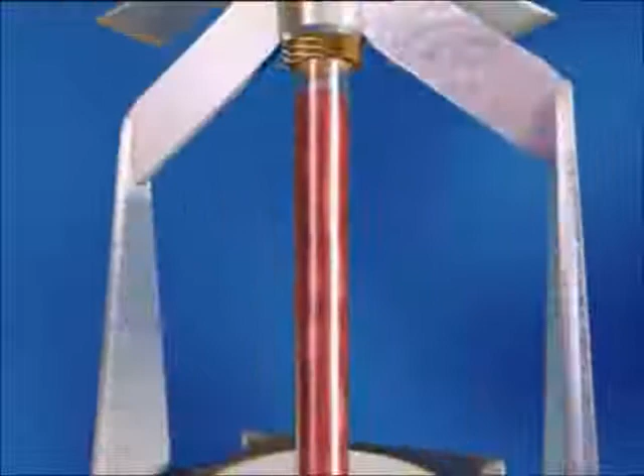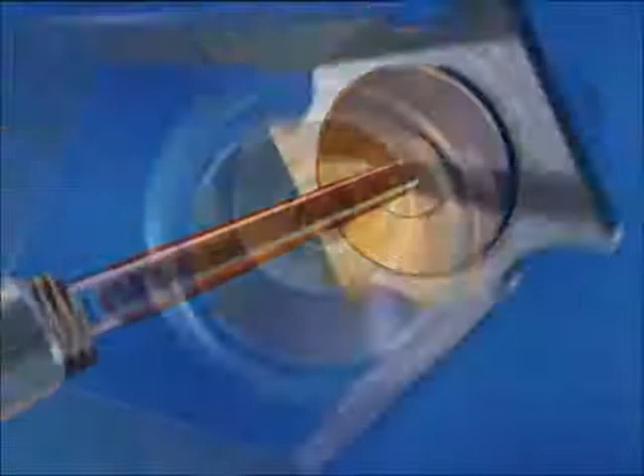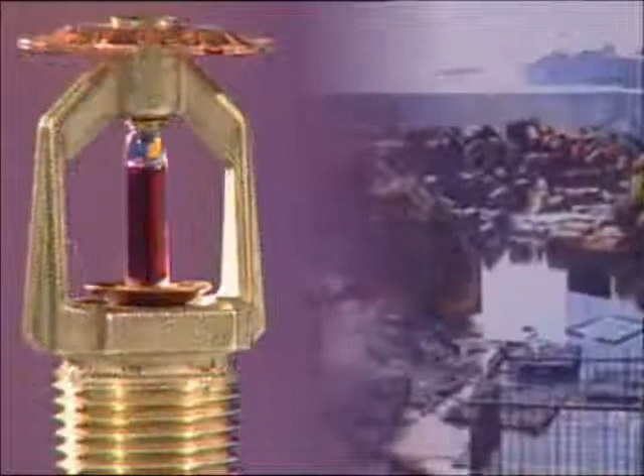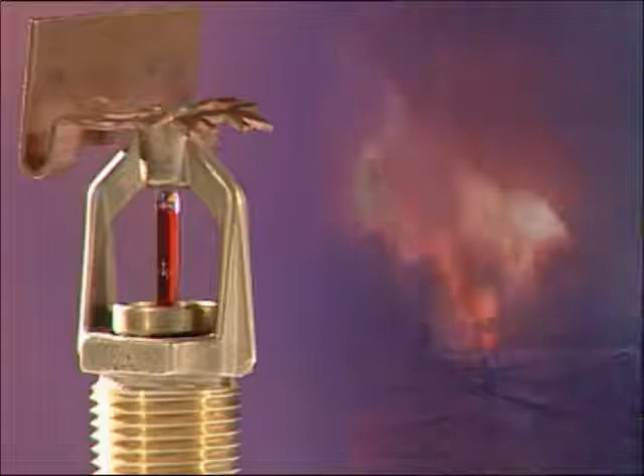Fire sprinkler systems were invented over 120 years ago. Since then, several hundred million sprinkler heads have been installed throughout the world. In that time, they've effectively protected thousands of buildings, helped to prevent the financial collapse of numerous businesses, saved countless lives, prevented innumerable burn injuries, and protected the environment from catastrophic fire-related pollution. They're universally acknowledged as the most effective first line of attack against fire.

The world's first rules for the design and installation of automatic fire sprinklers were written in the UK by John Wormald in 1885. Fire sprinkler systems in the UK are generally designed in accordance with British Standard 5306 Part 2 and, in some instances, Loss Prevention Council (LPC) rules for automatic sprinklers. American rules may sometimes be used, being Factory Mutual or National Fire Protection Association.

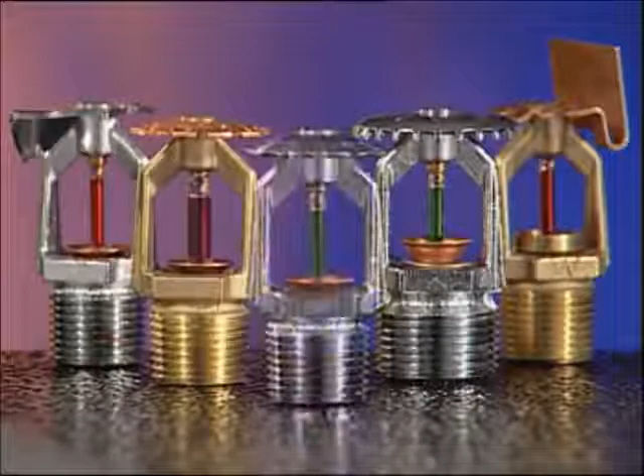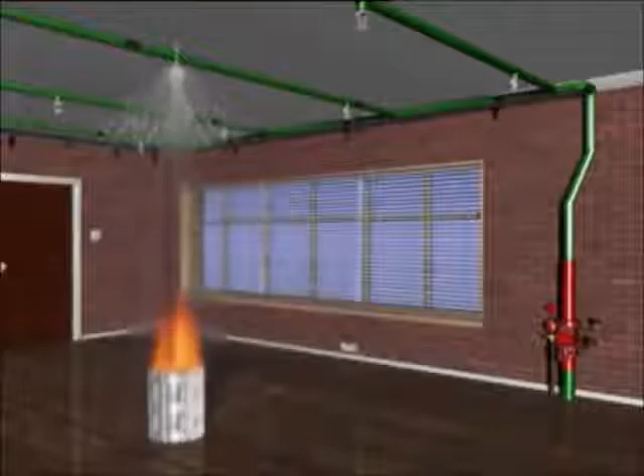Sprinklers are designed to cope with the fire risk presented by each individual building and may also be specifically configured to save lives. Water still remains the most effective firefighting medium available. Sprinklers will deliver water right into the heart of a fire during its early stages through a specially designed sprinkler head. Sprinkler heads are unique. They automatically detect a fire, discharge water right into the seat of the blaze, and operate a local alarm. They can also operate a remote alarm to alert the fire brigade or other emergency centre.

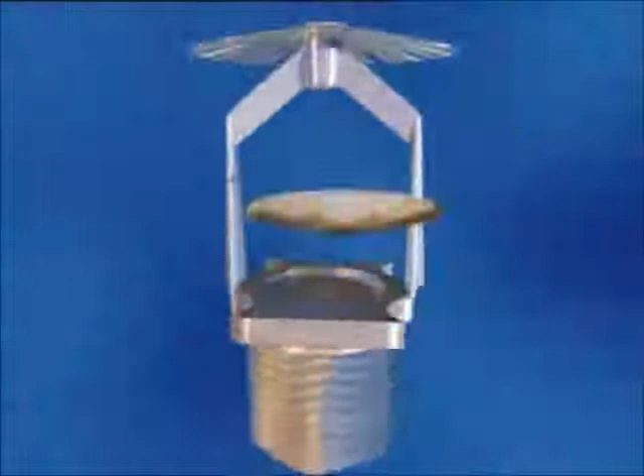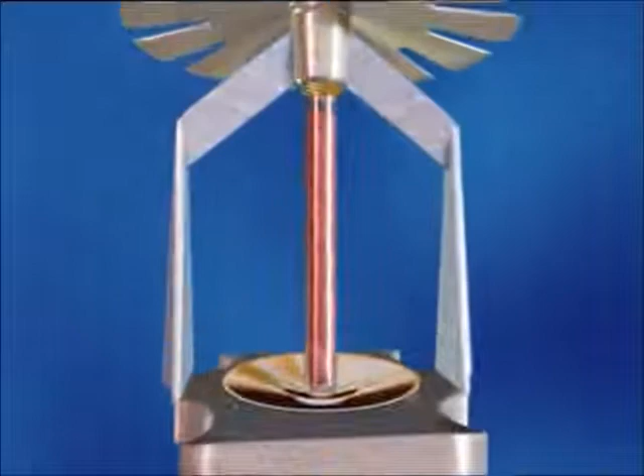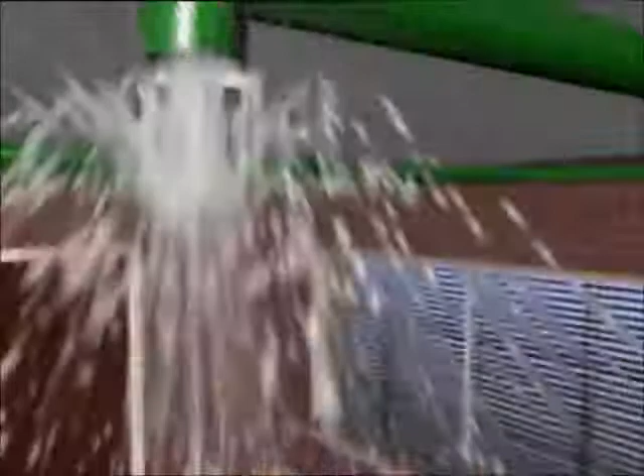A typical sprinkler head comprises a threaded body to connect to pipework, with a valve seal to hold back the water. The valve seal is retained by a glass bulb which contains a liquid that has a high coefficient of expansion. A small measured quantity of vapour remains trapped when the bulb is hermetically sealed. When the liquid expands under the influence of heat from a fire, pressure in the bulb rises until the vapour is compressed. Further increases in temperature cause a rapid build-up of pressure sufficient to shatter the bulb, releasing the valve seal and allowing the water to flow onto a water distribution deflector. This results in an even distribution of water droplets in a predetermined pattern over the fire.

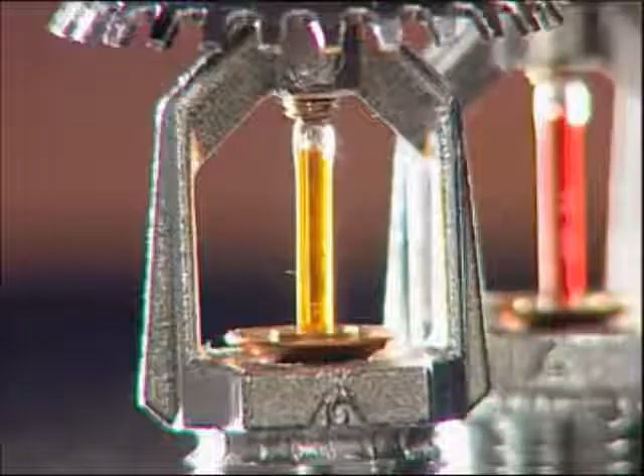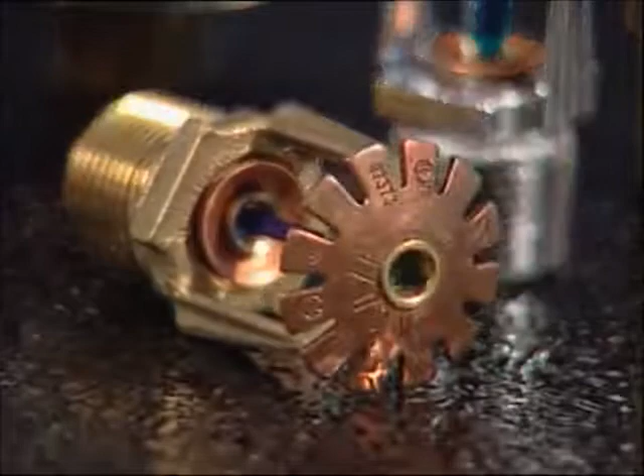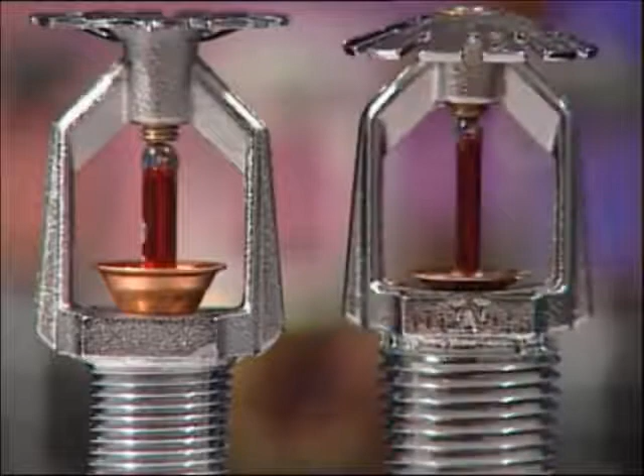Sprinkler heads are available in a variety of operating temperatures, which are identified by the color of the bulb. The specifier has a vast array of sprinkler heads available to him. Each type of head is designed to cope with different fire risks, different operating temperatures, and different operational requirements. The British Standard defines fire risks as light hazard, ordinary hazard, or high hazard. Generally, as the hazard increases, so does the water discharge or density discharge.

Conventional sprinklers can be mounted in either the upright or pendant position, with a deflector designed to spray a proportion of the water discharged onto the surface of the ceiling. Spray sprinklers in upright or pendant positions are used for applications where all the water needs to be discharged downwards. Sidewall sprinklers are primarily used to keep ceilings clear of pipework for aesthetic reasons or to avoid having to disturb existing ceilings when installing. Each sprinkler protects up to 17 square meters in light hazard fire risks and 9 square meters in ordinary hazard fire risks.

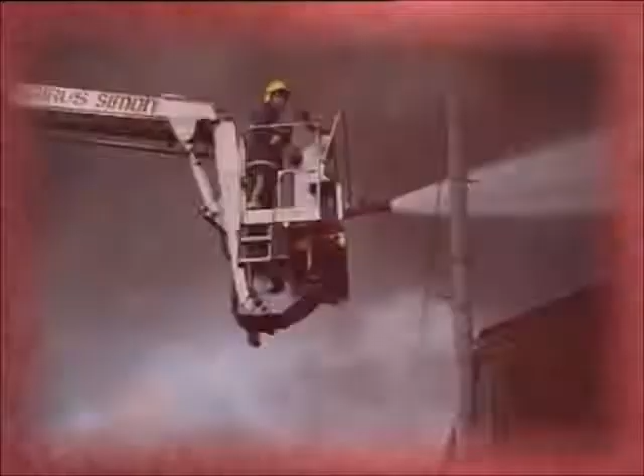Sidewall sprinklers with extended coverage are specifically designed to give an extended coverage of water distribution, with one sprinkler able to protect an area of up to 21 square meters. This type of sprinkler must have a quick response bulb. In a fire, few deaths result from direct contact with flames. The greatest threat comes from inhalation of the products of combustion, such as carbon monoxide, hydrogen cyanide, hydrogen chloride, other toxic gases, and the associated heat.

The reaction time of quick response sprinklers minimizes the life-threatening levels of toxic gases and temperatures. In many environments, there are people who cannot escape without assistance, such as in hospitals or homes for the elderly. Quick response sprinklers provide valuable time for those in charge to assist their escape.

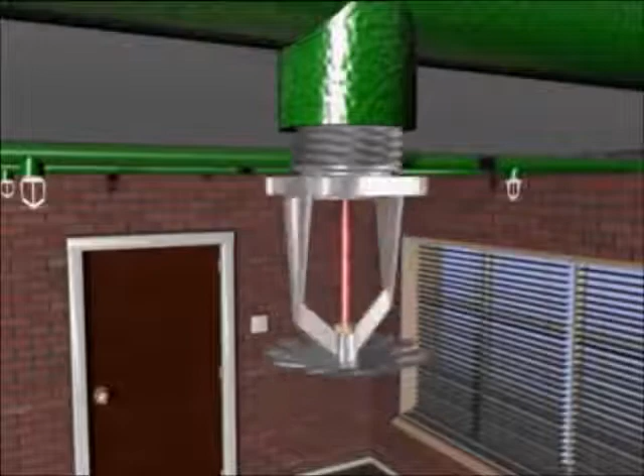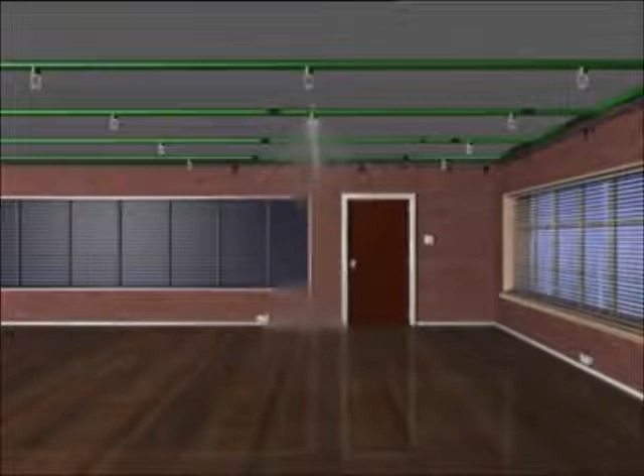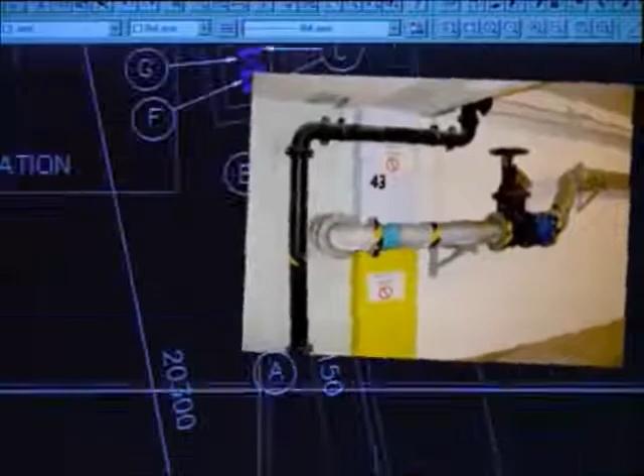A sprinkler head is connected to a water supply via a network of pipes fed throughout the building. The area protected by each sprinkler head can vary from 9 square meters to 21 square meters depending on the fire risk. The pipework is hydraulically designed to ensure the correct flow and pressure of water is maintained at each sprinkler head. The water supply to the system can be fed from the town main for light to medium fire risks, such as residential, offices, hotels, and light manufacturing and commercial occupancies. For high fire risk areas, such as heavy manufacturing and warehouse storage, a pumped supply from a water storage tank or reservoir is normally necessary.

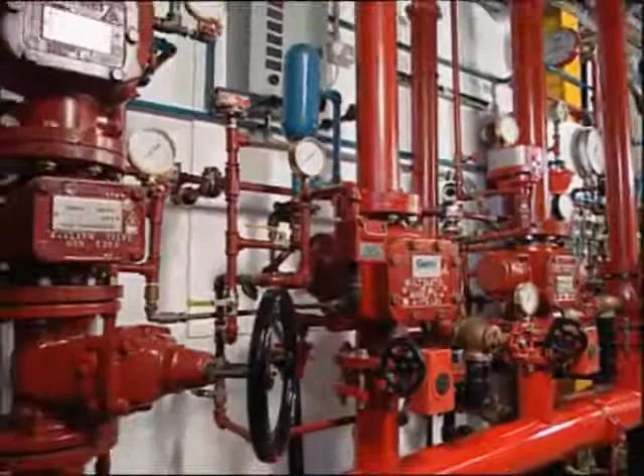The design requirements are specified in the British Standard BS 5306 Part 2 and LPC, FM or NFPA design rules. A control and alarm valve automatically delivers the flow of water to the sprinkler heads. There are generally 5 types of sprinkler system that all require different valve arrangements. A wet system is where the pipework is permanently charged with water and used to protect premises where temperatures are unlikely to fall below freezing point.

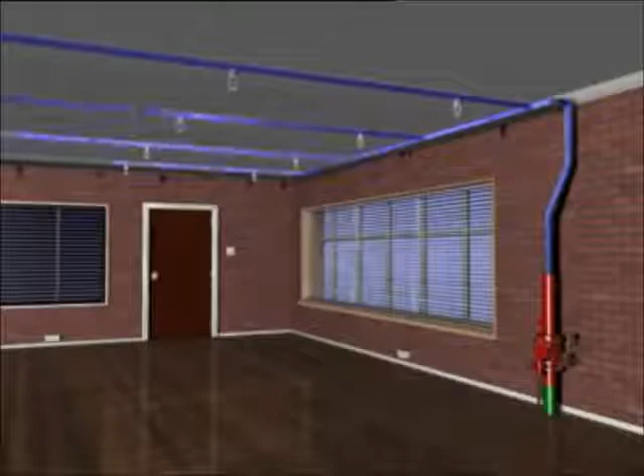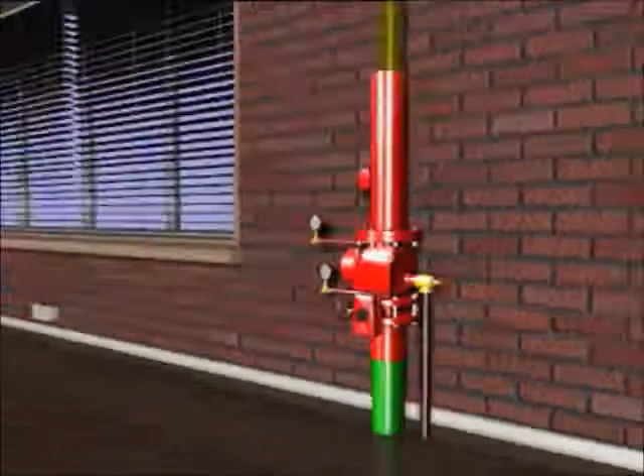Where the ambient temperature may fall or be below freezing point, the presence of static water in the sprinkler pipes is clearly undesirable. In this situation, a dry system can be installed in which the pipework is charged with compressed air. When a sprinkler operates, the compressed air is released and the control valve opens, allowing water to flow into the pipework and to discharge from the operated sprinkler heads.

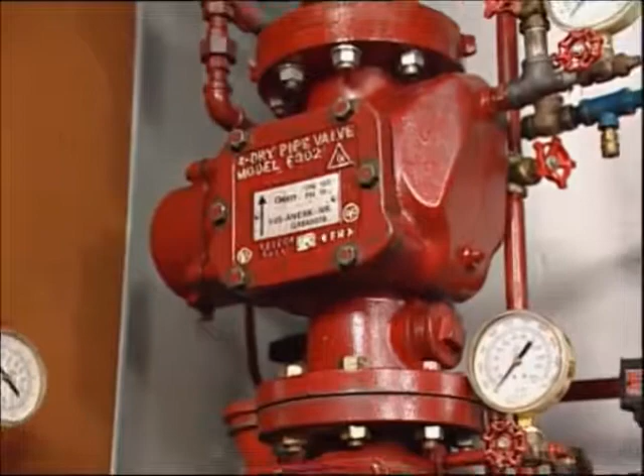An alternate wet and dry system, as the name implies, allows the system pipework to be alternately charged with water in summer and with air in winter, when there is a risk that the ambient room temperature can fall below freezing.

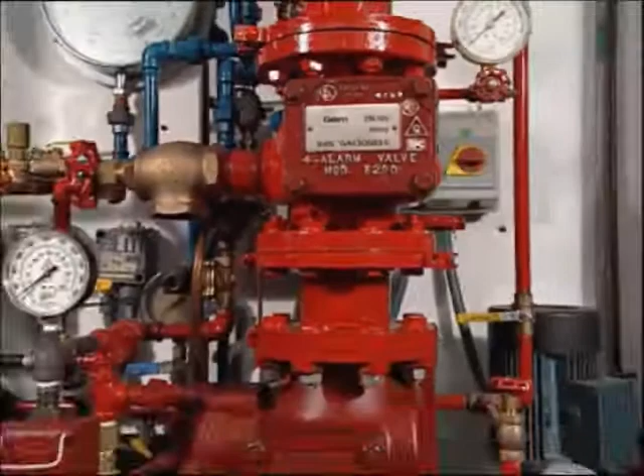Pre-action systems are comprised of a standard sprinkler system and an independent electrical system of heat or smoke detectors installed in the same areas as the sprinklers. On receipt of a signal from 2 or more detectors, the main control panel automatically opens the control valve, allowing water to flow into the sprinkler pipework. Water is only discharged when the individual sprinkler heads reach their operating temperature.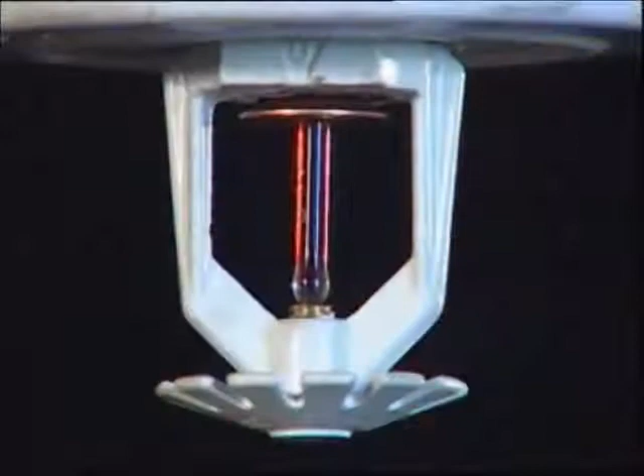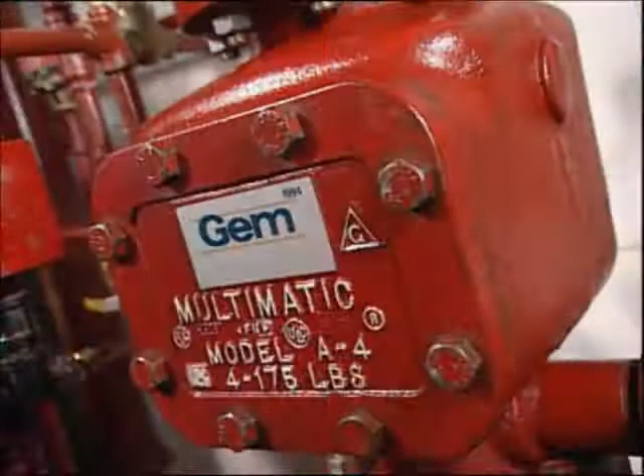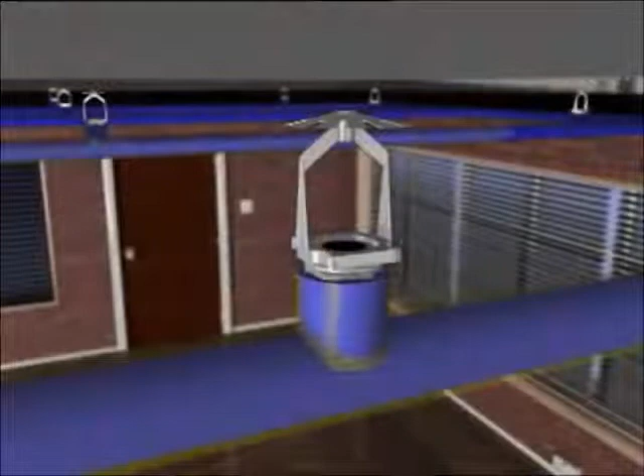Any physical damage to a sprinkler in a non-fire situation will not result in water discharge, but will cause both visual and audible alarms to be raised at the main control panel only. A deluge system, unlike any other typical sprinkler system, is designed specifically for high-hazard applications with fast fire growth potential. The deluge valve is actuated by a separate detection system responding to a fire. This brings a large number of open sprinklers into action simultaneously throughout the protected area.

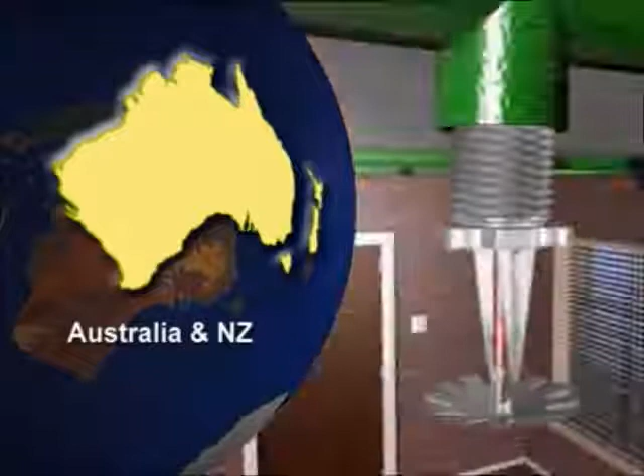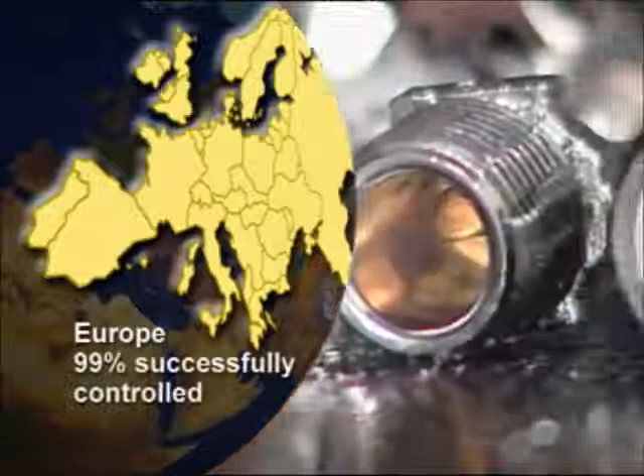The successful performance of sprinkler systems has been detailed in records from across the world, paying testament to their outstanding reliability and effectiveness. In Australia and New Zealand, where it's a requirement that all fires must be reported, records reveal that over a 100-year period, sprinklers successfully controlled 99.5% of fires in sprinklered premises. Statistics collated in Europe over the last decade are remarkably similar, showing that in fully sprinklered premises, 99% of all fires have been controlled by the sprinkler system.

The reason sprinklers are so effective is because they attack the seat of the fire before it has time to grow and spread. There's no excessive use of water. In Germany, for example, 86% of fires in sprinklered locations have been controlled by 5 or fewer heads. In the UK, it's reported that of the fires in sprinkler-protected buildings over a 10-year period, almost half were controlled by 1 or 2 sprinkler heads only.

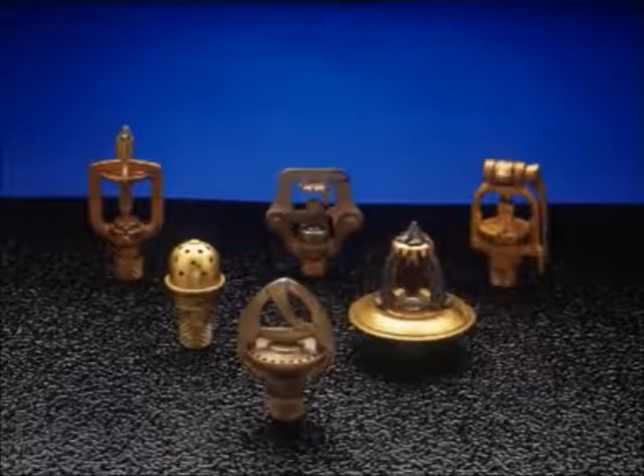Fire brigades, local government authorities and politicians alike have all seized upon these statistics. This has generated numerous campaigns for sprinklers to be installed in applications that could only ever have been dreamt about when sprinklers were first commercially launched over 120 years ago. That's because sprinklers are unique. They not only detect a fire and raise an alarm, they operate to control it and in many cases extinguish the fire before the arrival of the fire brigade. Only the sprinkler heads closest to the fire operate.

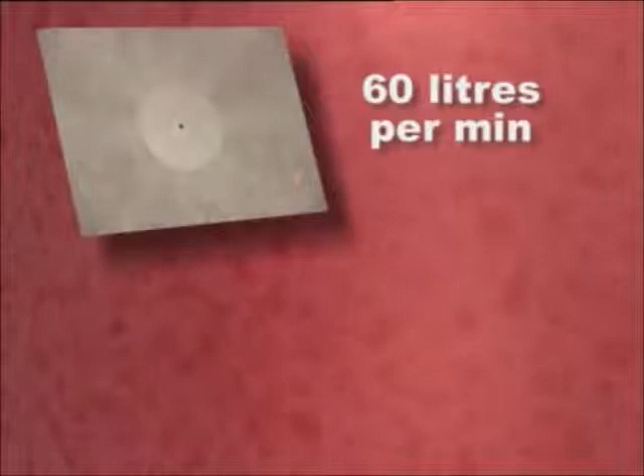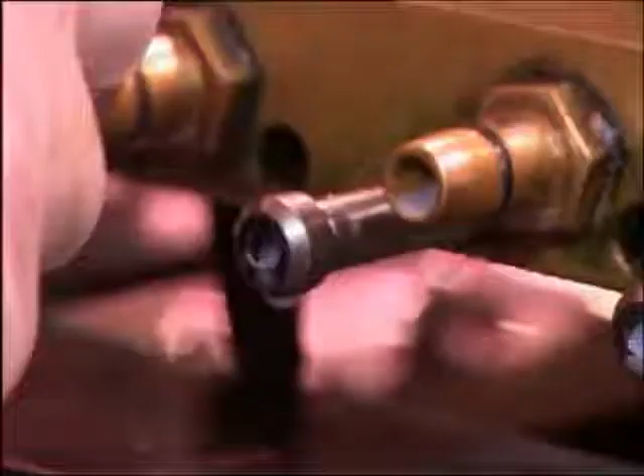Water is discharged by a sprinkler directly onto a fire at a rate of a minimum of 60 litres per minute, in comparison with an unsprinklered building where the fire brigade using only 1 fire hose could discharge 500 litres per minute. The fire will also be much larger as it will have grown for at least 10 minutes before the fire brigade arrive, so the likelihood is that more than one hose would be used. Worldwide research shows that of the 40 million sprinklers installed every year, only 2 may operate accidentally. This is because every head is individually tested before leaving the manufacturer.

Sprinklers are economical to install. For example, in the case of office blocks and hotels, the sprinkler system would cost about the same to install as a quality carpet for the equivalent area. Sprinkler systems will have a lifespan of at least 25 years, probably 50 years. Some systems are still in use today that are over 120 years old. The threat from fire will never change. It will always be with us, endangering life, property, and the environment we live in. Fire sprinklers will protect us and future generations. Fire sprinklers. Protection for life.